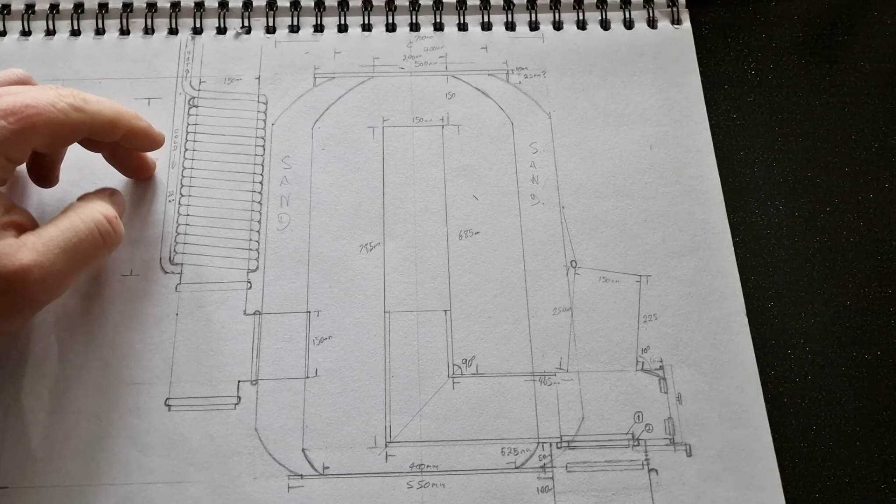So here's my drawings, what I'm planning on doing, and I'll show you that now. The idea is that it will be able to supply us the underfloor heating, hot water into our cylinder whilst we have no sun. And when there is sun, then the solar power that we have will heat our cylinder for us. So yeah, it's exactly the same.

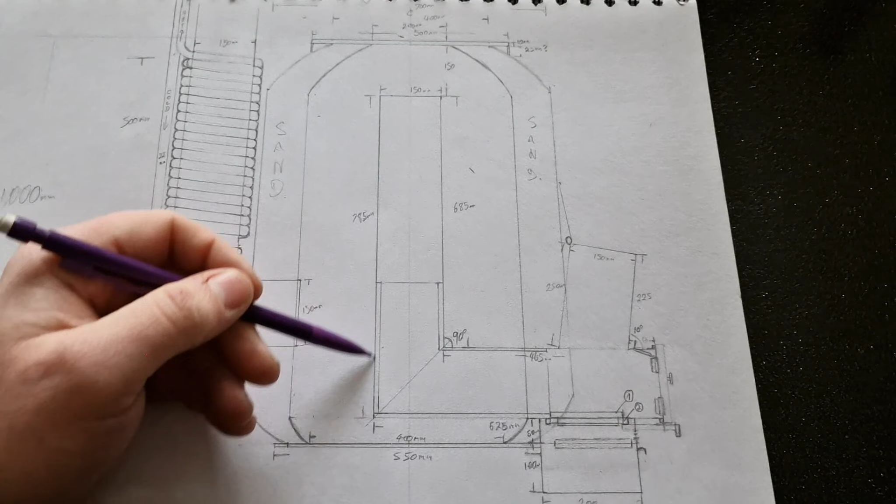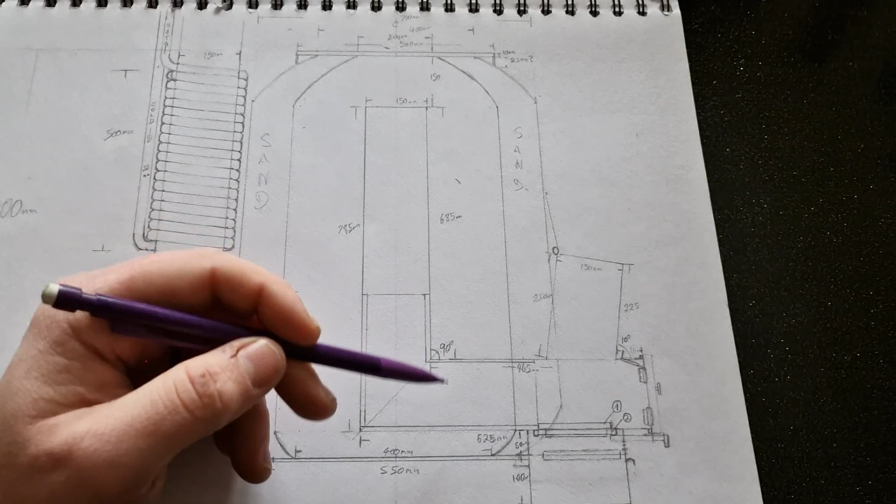The only difference is, here I've come up with an idea: I've got some ceramic insulation that's going to go on the inside of the pipe, because this is like a 6-inch pipe, so it's massive. That insulation is 10mm thick, ceramic insulation, good enough for 1500 to 1800 degree temperatures, and that will protect the steel, because we don't want to just melt the steel when we get to those crazy hot temperatures for the gasification and the gas burning off. We don't want the steel to melt, so that'll cover us there.

There'll be an ash pot that I'm going to build underneath here.

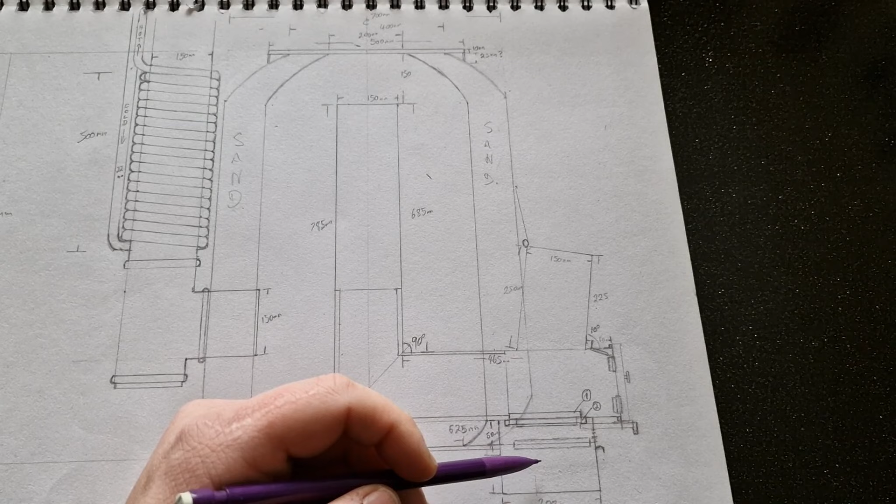There are 2 grates, so 1 grate slides side to side like a shaker grate, and then the ash drops down into the box, and the box will be able to slide off, and we'll just bin the ashes when they're cold.

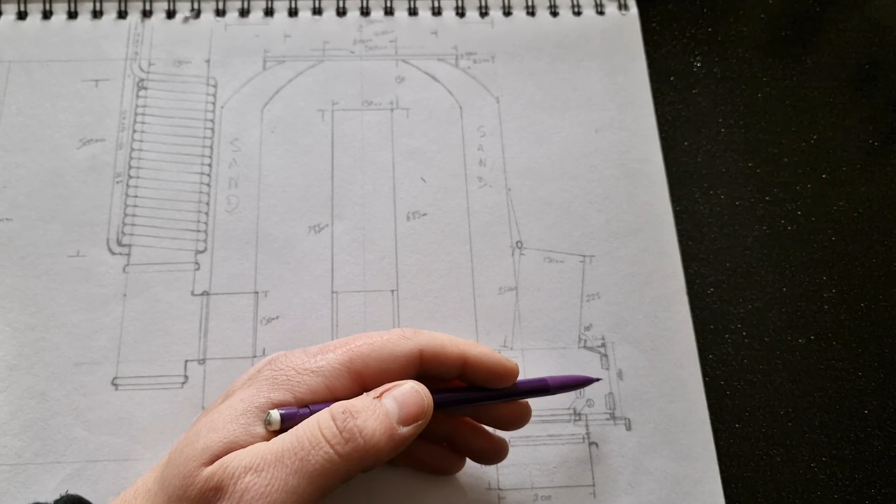There's a feeding tube at the top here with a lid, so we can close that off. There'll be some venting tubes coming across into the front, but I haven't set them up yet, so I'm not quite sure how they're going to fit. And then a glass door on the front, which I have already bought the glass. Yeah, we should be pretty good, hopefully.

So I'll take you to what I'm going to attack and what I'm going to build. Okay, so this beast, excuse the state of my workshop, it's horrendous in here. This beast is going to be the center of the log burner, of the rocket stove.

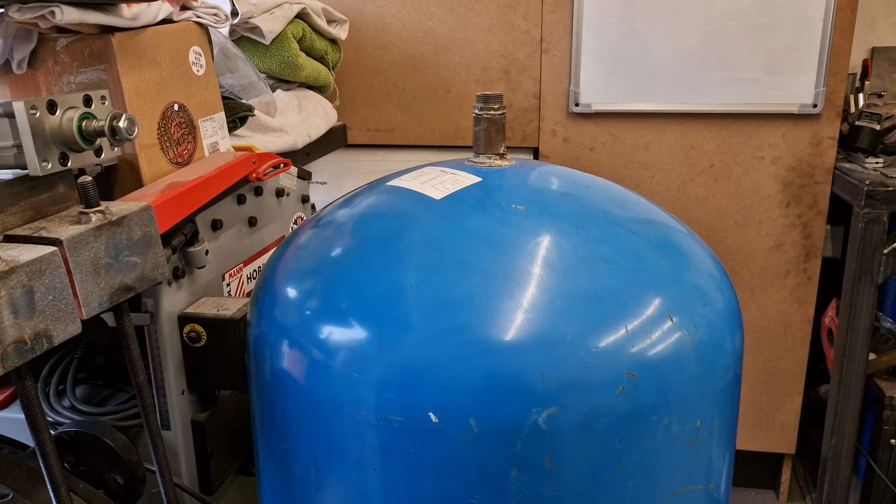So unfortunately it needs cutting in half because it's not long enough. It needs to be taller, believe it or not. And then I need to cut the top off because that's going to have a big thick plate on it, and the bottom off because that's going to go into the big cylinder out there.

And yes, that monster is a 500 litre cylinder.

That cylinder is going to be the outer shell, but that's actually going to get cut as well because I don't want that rim around it in the middle there, and it's also too tall, so that's going to get shortened, with a flat lid on top and a flat base on the bottom, and that base is going to get cut off. Or I might even keep the base because I kind of like it. I think it's quite cool.

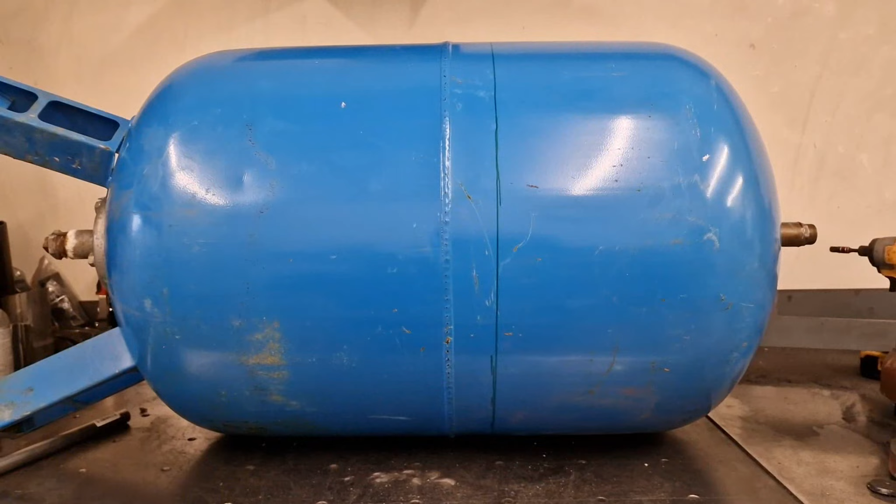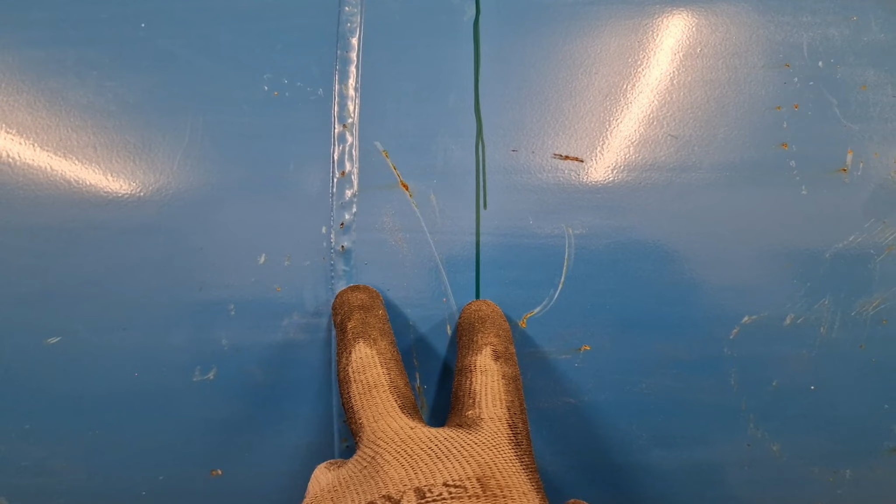Okay, so there you go, that's where I've got to cut it. I'm going to cut it along there, and then I'm going to cut out the top and the bottom as well. But I'm cutting it there so that I've got an overlap of about 50 mil to weld when I get the extension, because I need it longer. So there's about 400 mil extension going on this tank.

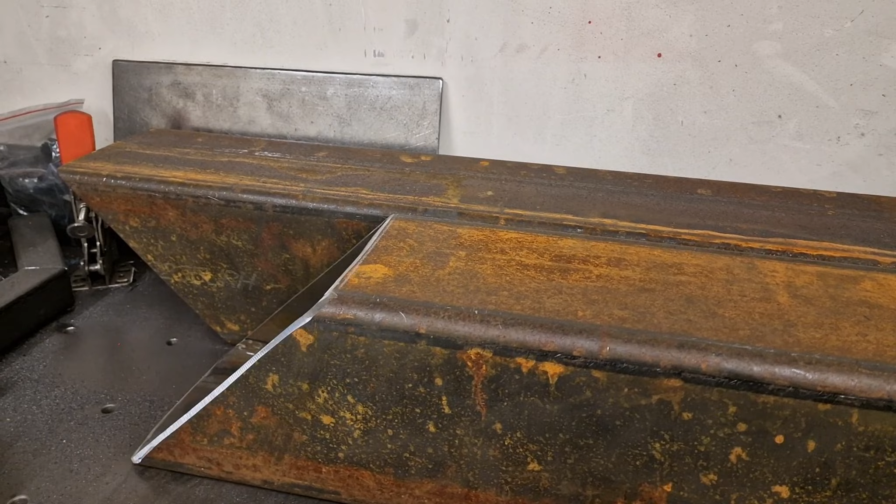I've got my mask on, excuse the sound. Obviously it's not nice in here, it's very dusty. You can see this part here is the base part of the chimney. That's got 45 on it, so they go 90 degrees up. That's got quite a lot of work to do to it yet.

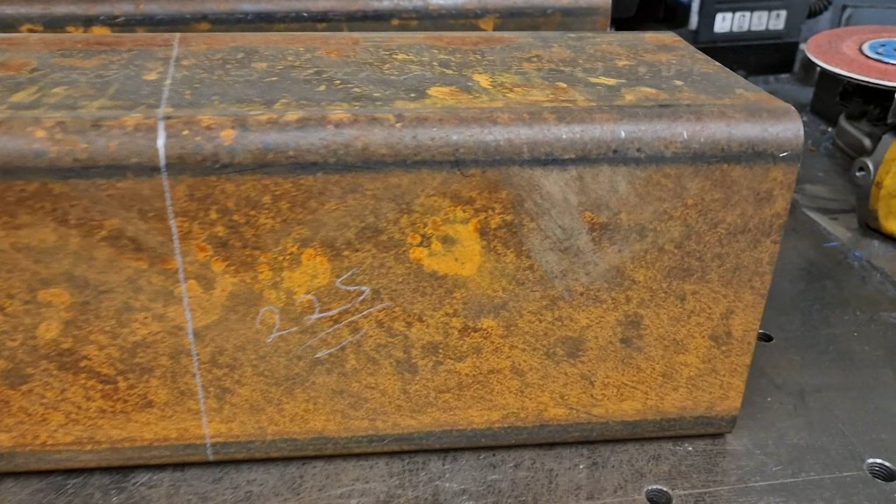I've got to cut out a piece at the front here, and I've also got to add the feeding tube, which will be this one. This is all made out of 6-inch steel by 5mm wall, so 6 inch by 6 inch.

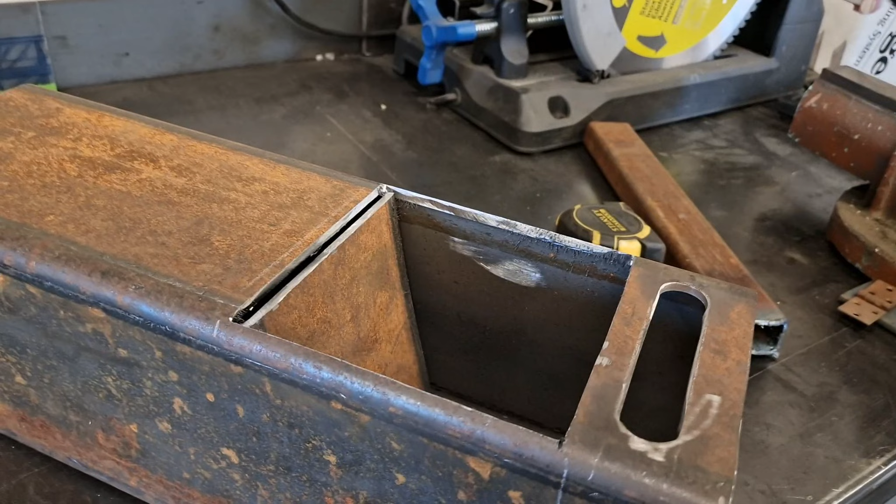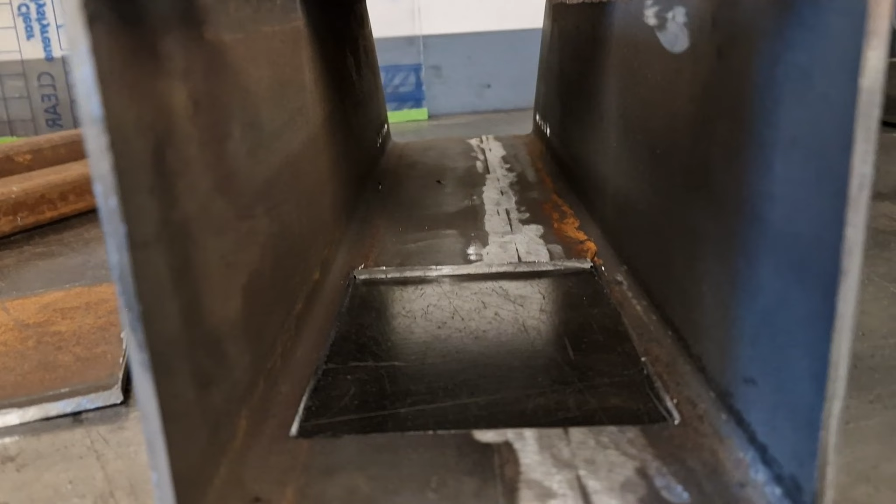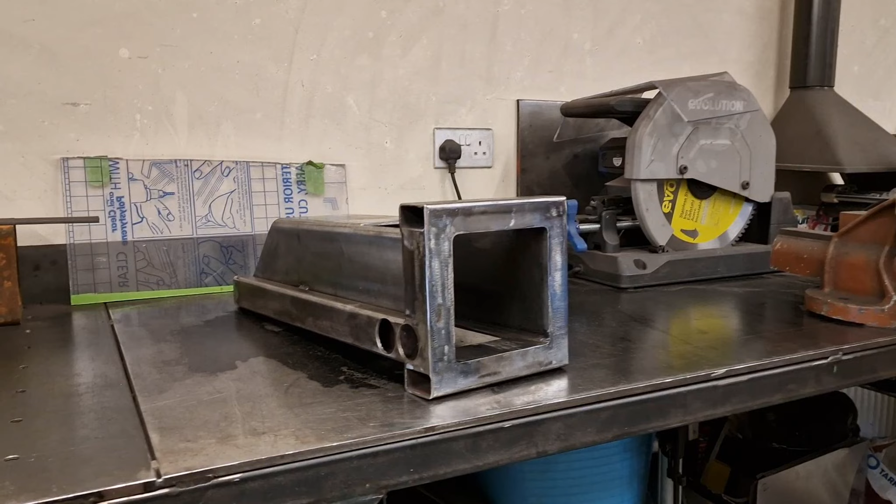Right, so the log burner so far, thermal mass stove, whatever you want to call it, confusion of lots of different things that it is. This is how far we've got at the moment.

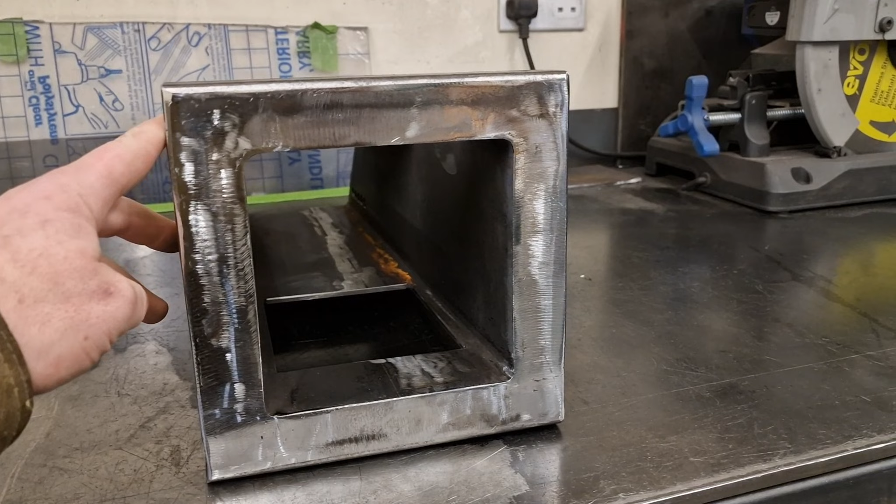I would want to show you a few more steps along the way, but I just need to get bits done on it because it's getting cold again outside, so I'd like to get the thing built.

But we've got, this is a 50mm by 30mm box section by 4mm wall, and these are the same, it's the same all the way around. I've just built a frame around the face of the 6-inch box section, 6-inch by 5.

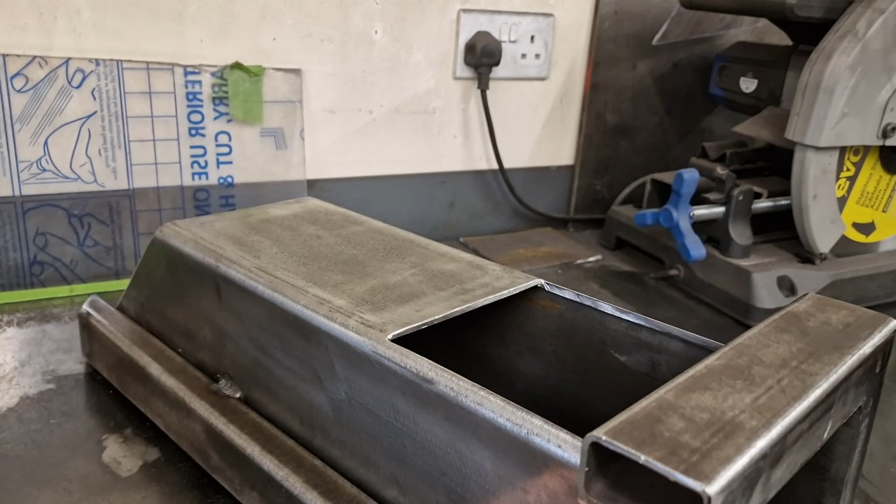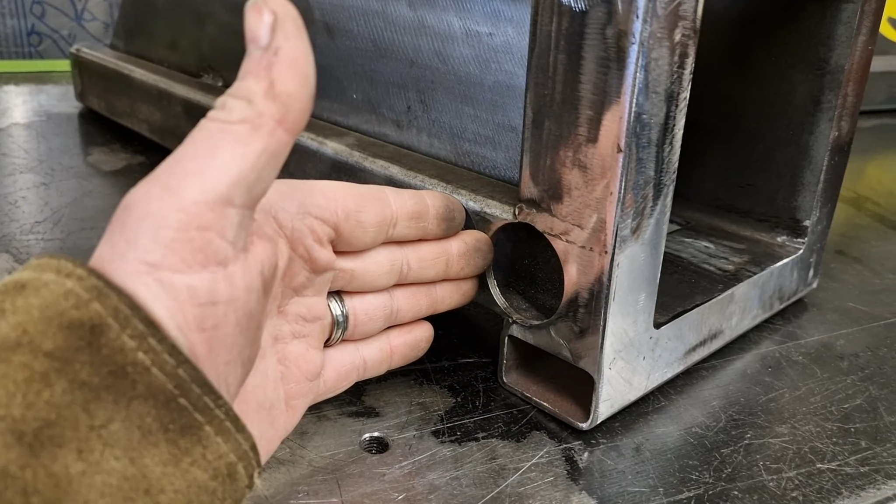These are the rear vents. So these rear vents here are going to have a slide on them to allow the air to get into the back. We'll have two different stages, so these are 40mm holes, you can allow 40mm worth of air getting through to the back vents, or you can allow 80mm of air getting back to the back vents. The back vents come all the way along, so they're closed off at the back, and as you can see, 5 12mm holes drilled through the back there.

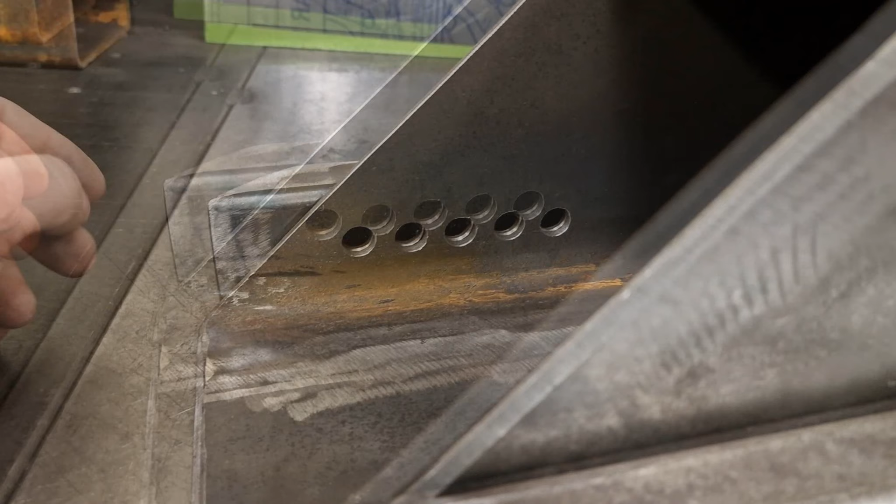I know that those holes there are nowhere near equivalent to those holes there, but it will mean, sorry about doing this all one-handed, it will mean that these, when these are drawing, they've got plenty to pull.

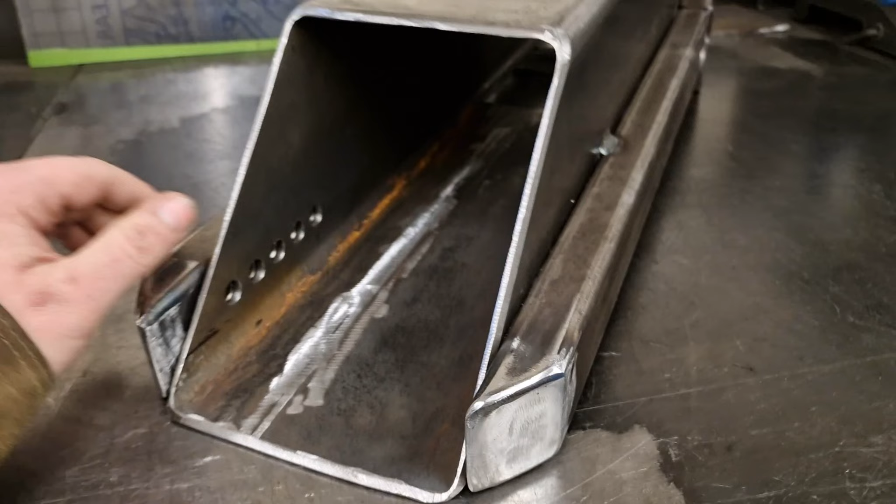Yeah, I want to get all this lot on first before I attach that big git over there, because that's the chimney part of the blast chamber.

This is the blast chamber here. If I spin it around again, it's rather heavy as well.

So from the face of it, the door is going to hinge from this side, hinge across here. It will have a glass screen on the front, so that we can at least see into what we're burning a little bit.

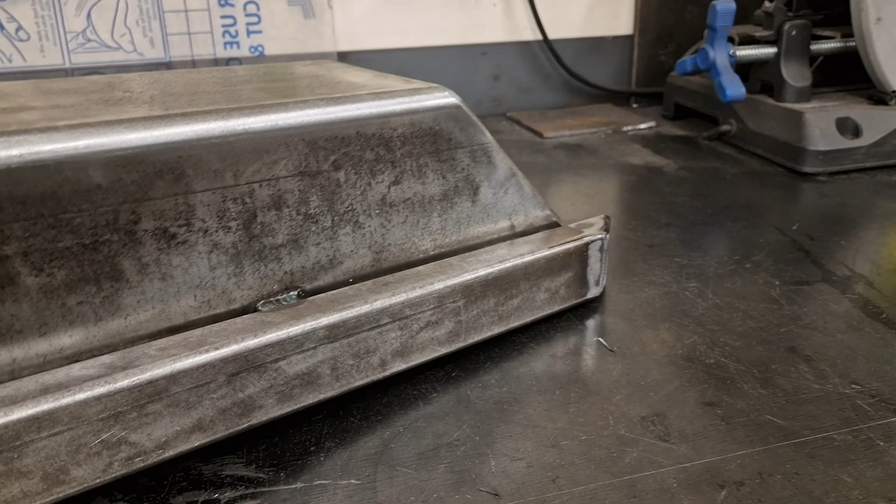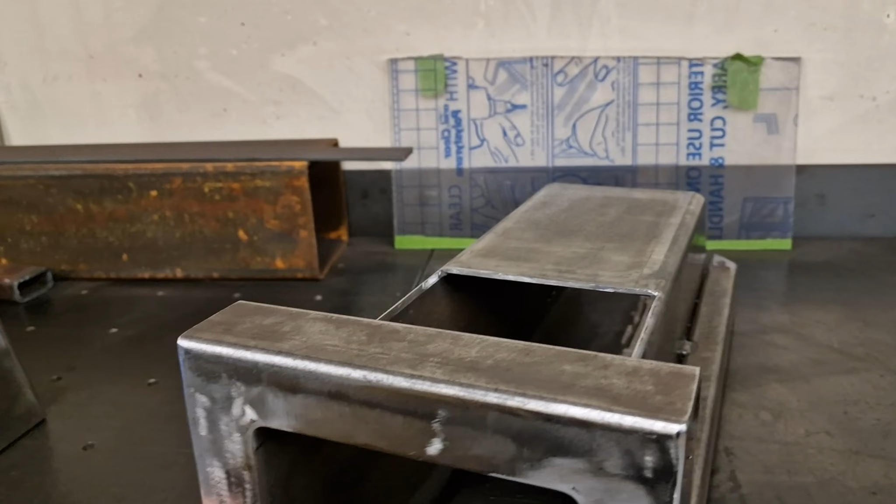That's the ash collection, ash tray, and that is the feeding tube. Obviously exactly the same air vent tubes on the other side going to the back. Visual weld again. Let me just put the top tube on for you, the feeding tube, so you can see how that'll look.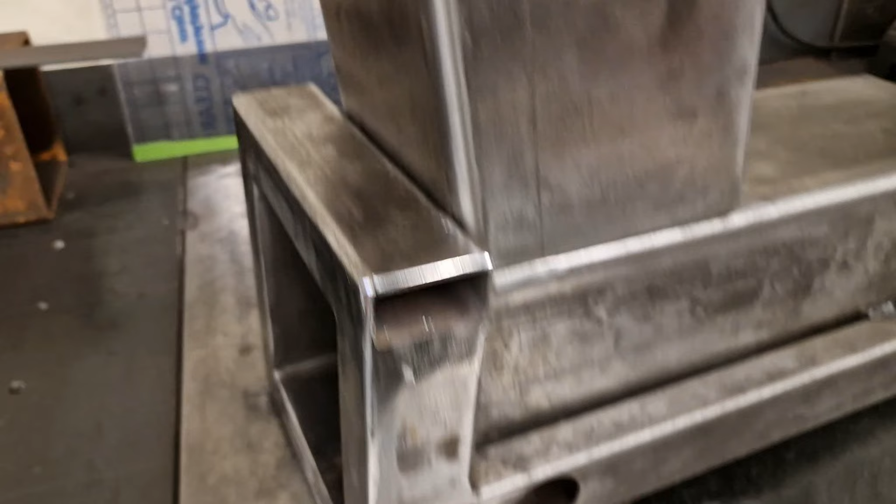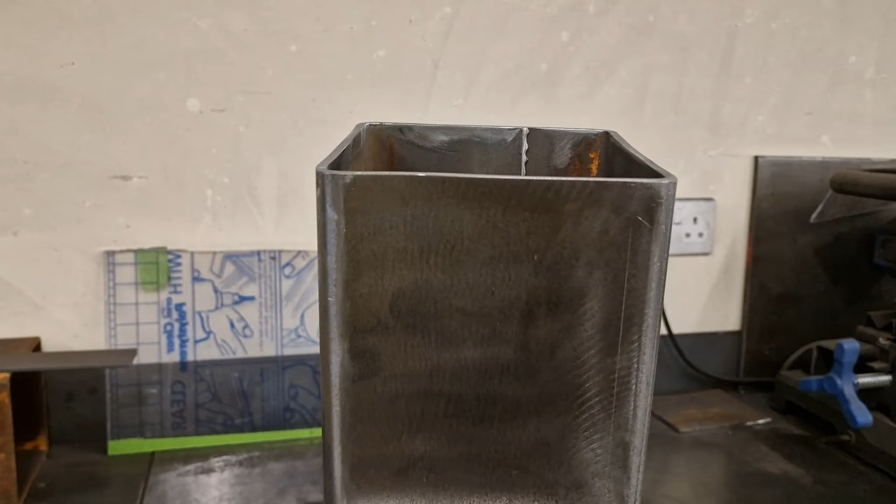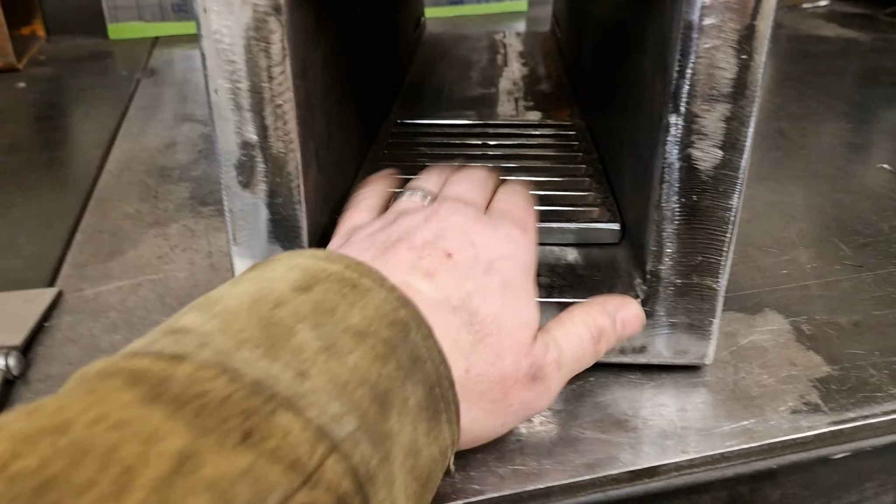The feeding tube is going to be solid welded all the way around, and then that's in from the top straight into the grill, which I have just put on there. If I can spin this, it starts getting a lot heavier when you start putting the feeding tube and everything else in, and the grill in. So the feeding tube there is 6-inch by 6-inch by 5mm wall, might just be 6mm wall, that stuff. I think it's 5mm.

I got a mate of mine to just laser cut out the grill for me. We have 2 of those grills, there's another one over there. They're going to shake against each other to get the ash through. But I just had to obviously grind the edges down to get it to fit nice and snug in there, and that will sit over the top of that hole.

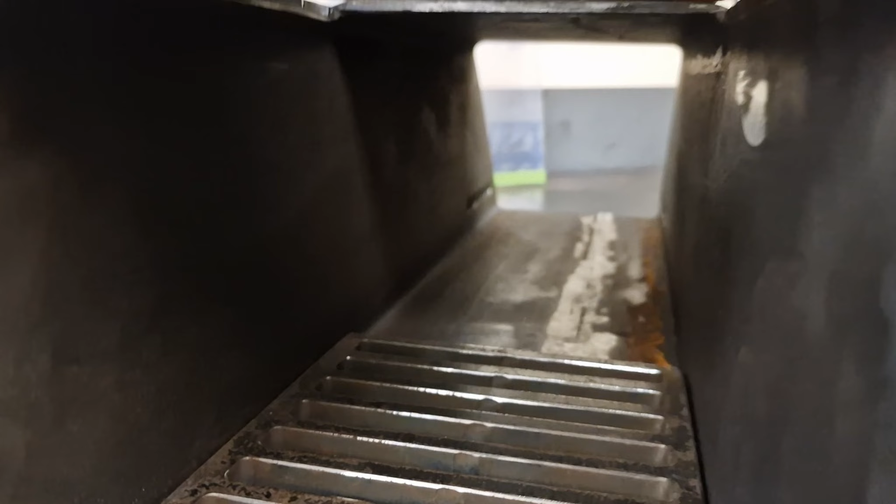All the way around this chamber through the back there, there's going to be ceramic insulation board, because this is going to get really, really hot. The back end, where those ports are at the back down there of the burn chamber, is going to be probably pushing the 800 degrees area. So yeah, that needs insulating to stop the steel from burning out. I know obviously the steel didn't melt till 1200 degrees, but again, I don't want to be pushing the steel and weakening it all the time.

So yeah, that grate will just slide straight out, and that will allow you to get to the second grate and obviously scrape out the burn chamber all into the bin.

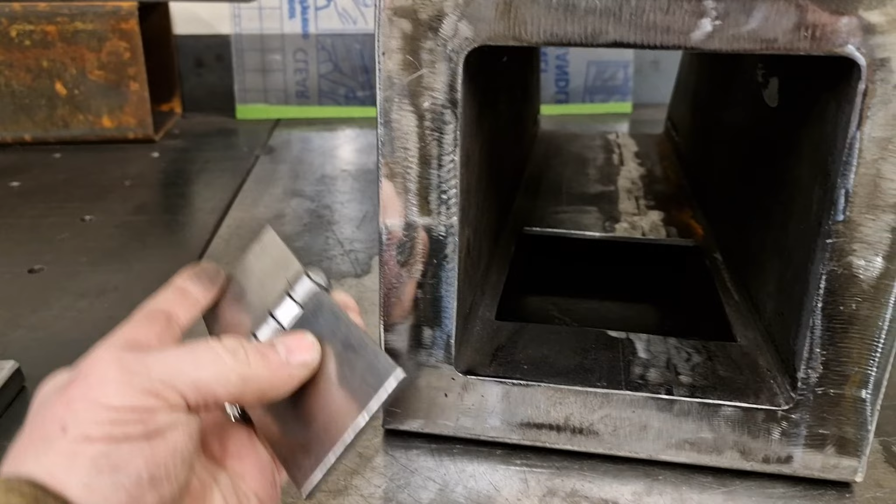This is one of the hinges that will be on the side, sorry, and that will sit on that side there for the door. Obviously it needs cutting down, but that's going to sit there for the door and open nicely.

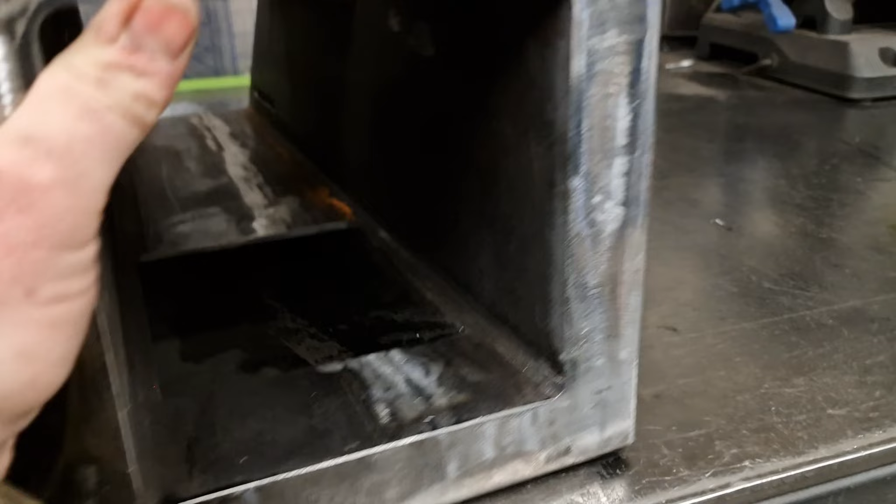Then the slide part, if it didn't make much sense because I was just talking about it and not explaining it - the slide part here, that is going to sit... that's going to sit there. Not that I can hold it at the same time as do this. So that's going to sit on the top of there, welded in. And as that sits there, it's not even going to stay, is it?

One second. So as that top one sits there, this slide plate is going to have a stop about there, so that it stops before getting to the end of the tube. And then this will slide back across that and open up like so. Very difficult for me to try and explain with one hand.

Obviously, as most of you guys know on the channel, I am sat in the wheelchair, I am paralysed, I have no abs, so trying to do everything with one hand is rather difficult. Yeah, that's also why this thing takes so long for me to make, because I'm trying to handle all this lot with one hand.

I'll show you guys a little bit more when I get a little bit further on. Obviously, this is the most complicated part of it, lots of little bits to work out. Once that's done, we'll be flying along and we'll make some bigger progress. So I'll bring you back in a bit.

Sorry guys, the one bit I forgot to mention to you is, as well as these side vents here, this side ports, the 40mm ones, there's also some 50mm, the 50mm by 30mm box section up here. That is ported inside. I don't know whether, probably can't see the port down there. Inside, no, it's not going to focus.

So yeah, they're ported, so both sides are going to have a vent door on them. It's going to be a little bit of a pain because it's going to be open that side to vent it, or open this side, or both. But it does give you more versatility, I suppose, with the burner itself. One port up here to open, close, whichever way I decide to make that, and another one there to open, close, whichever way I decide to make it, which I've not quite decided yet. I've got 2 options, but I can't decide on one, so yeah. Then also the port obviously is, it's not going to show you, is it?

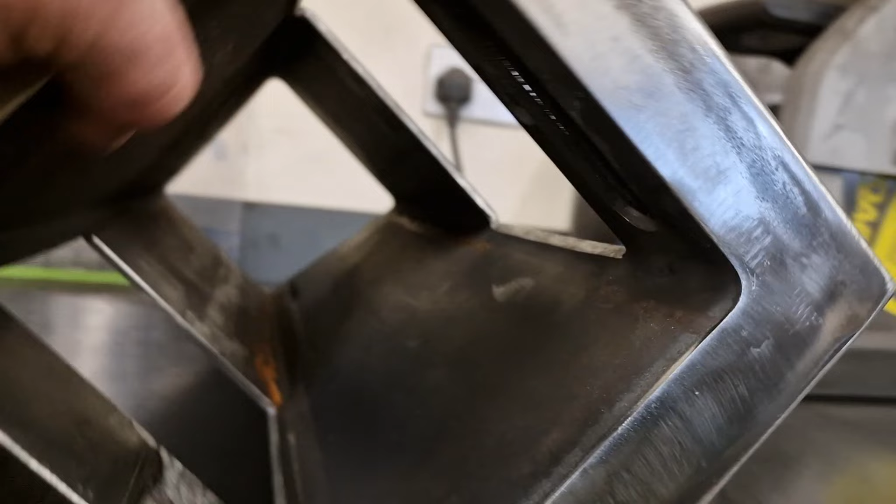So if I turn the whole thing on its side, you'll probably be able to see it then. There you go, so the port there at the top, which you can now see, was just drilled out and cut, obviously. That was drilled out with a 22mm drill bit, both ends, and then joined up in the middle. So it's 22mm by maybe 130mm long.

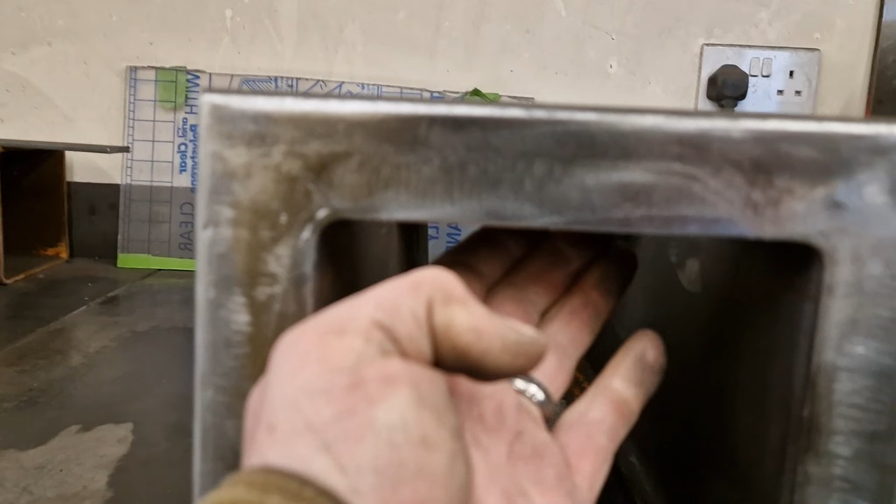That needs to be deflected forwards to blow, so the air gets sucked in through the side there and then gets blown or drawn out towards the glass, across the glass and down towards the fire. That keeps the glass clean from getting blackened, and this is the plate that I have.

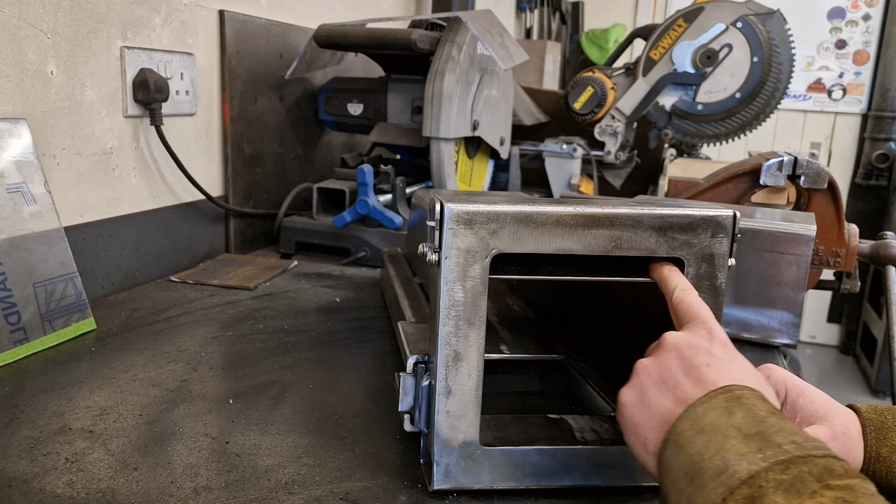We'll be going in around about there. So this is the front of the burner. You can see there is the baffle plate to send the air induction down the face of the glass, because there'll be a glass door here, a door with a glass window in it.

So the air will come in through both the air vents there. These air vents close down like that, and then you can open one up, or you can open them both up if you want.

40mm duct, so 50mm duct, so you've got 50 by 30mm box section on top here. The air goes in the sides, in there, and then gets drawn down across this baffle plate here, which is solid welded, through this baffle plate, hits the glass, comes down, and then underneath the burn chamber. That's the option from this side.

Obviously, the other option is to slightly leave the door open if you want to, which I don't really want to do because we've just got a new puppy, so that's not going to happen.

And obviously the top burn feeding tube. So they both close down, and this feeding tube will be sat on here like so, which I've already shown you before. But when that sits on there, obviously that's going to have a big lid on it as well, and that can be slightly propped open.

If I feel that we need more draft, then I'll put some more vents on the side of this. It won't be an issue, so I'm not worried too much. That can be done afterwards, it's dead easy to do.

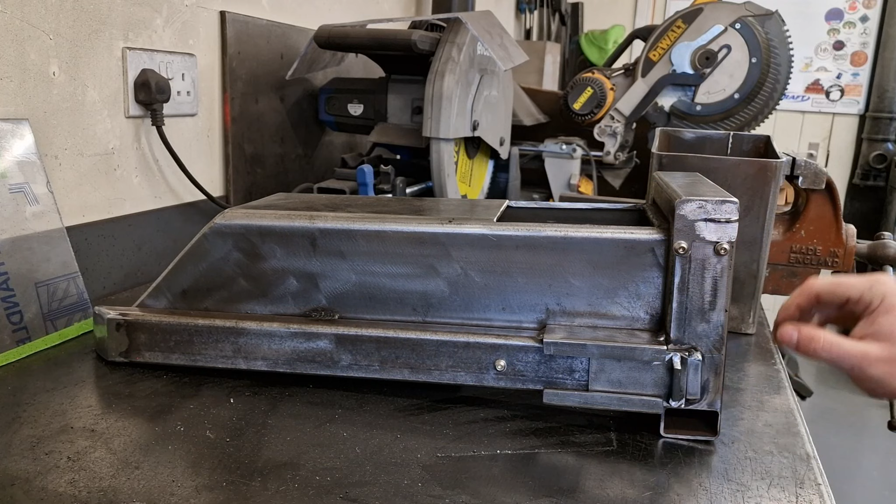So just a quick look at the side. So far what I've done is, like I said, the vent doors, which open and close like that. So you can open them up and you can close them. Just on spring washers, M6 bolts and a washer.

So if you press it, it stays in place. A little tiny handle on there just for novelty really, just something to catch hold of. If you've got a hot glove on, you can just catch hold of it, flick it up, and job done.

And then these ones here go to the rear ducts, which will go all the way back to the back of the burner itself. They open up and you've got two 40mm holes there, and they close up like that.

They're not the best fit. I could have made them tighter, but like an idiot, I made their little sliding handle too wide, and I couldn't get it past the welds, so I had to bring them out of target. But that will definitely stop the airflow from going down there, if it's needed to be stopped, that is.

And so the next job now, which is why I'm bringing you guys back, is to do the underside, which is the firebox with the ash box. I need that to slide in and out from underneath it, which is going to be quite a big job to make.

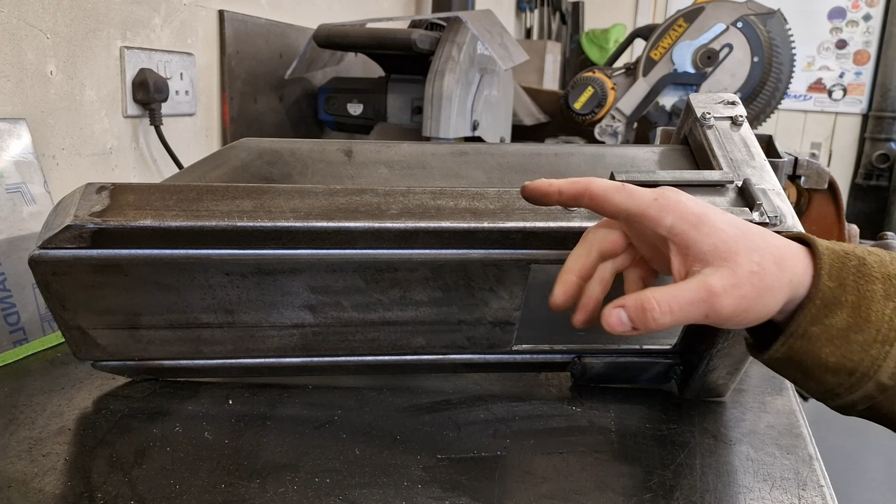And if I put the other part of the burn chamber on, it's going to make it too tall. I'm not going to be able to turn it around. It's also going to be too heavy for me to move around easily to get welding and all that sort of rubbish. And then next after that, I've got to make the door.

I've got the hinge already that's going to sit here, and the door will sit across and close that. So I've got to make the door yet, and weld on the feed tube on top. Then I can move to doing the blast chamber at the back, and actually start getting the paint off of the cylinders and connecting it all together.

So this is the most difficult, fiddly little bits of the job, and I've finally managed to work them out.

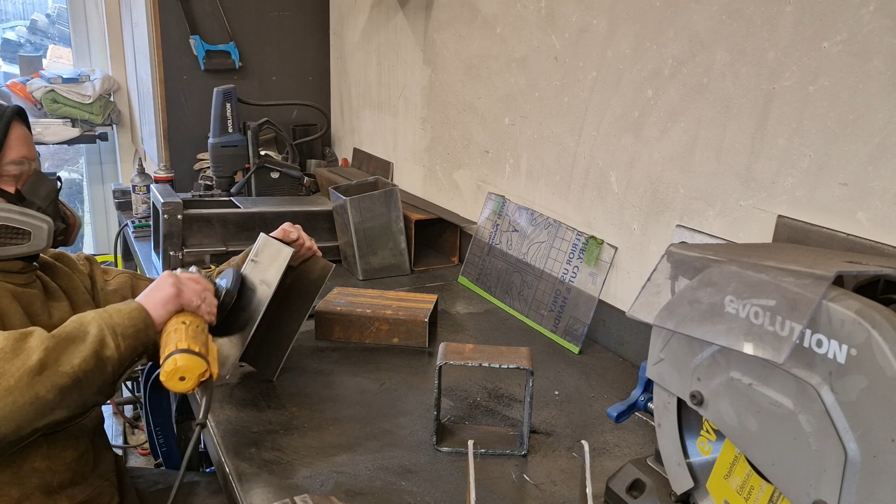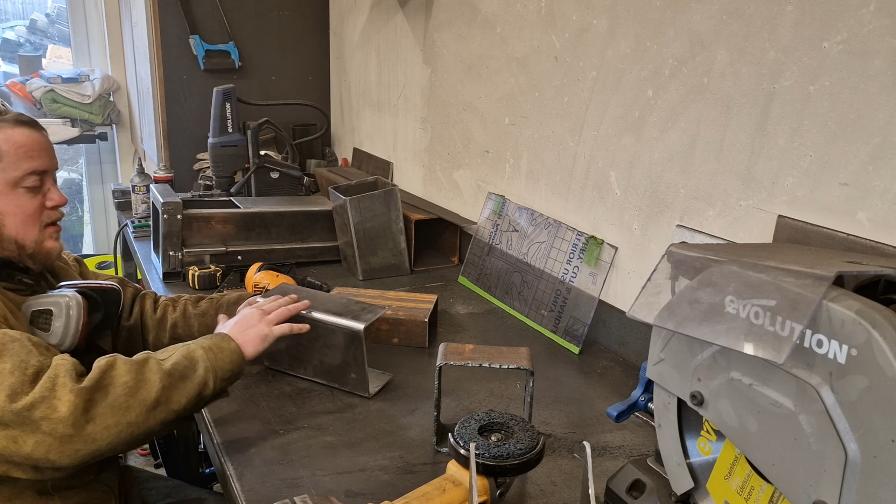Many hours later, it's all got to be cleaned up like this, so I can then acetone it afterwards. That gets rid of these little bits and little marks. And then it can be painted with the stove paint.

So, yeah, it takes a while. It's cold in here. It won't be when this thing's working.